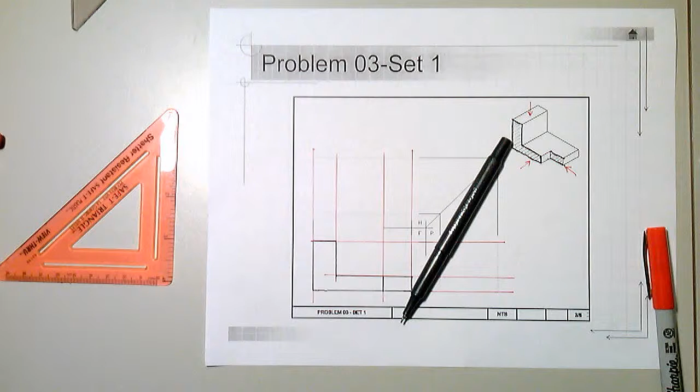Okay. Alright, so now we filled in the front view. Now we want to show our top view. Okay, and then what that's going to require is us to start blocking in this entire face, right? So we want to go ahead and draw these edges and the guidelines for the outside of the object.

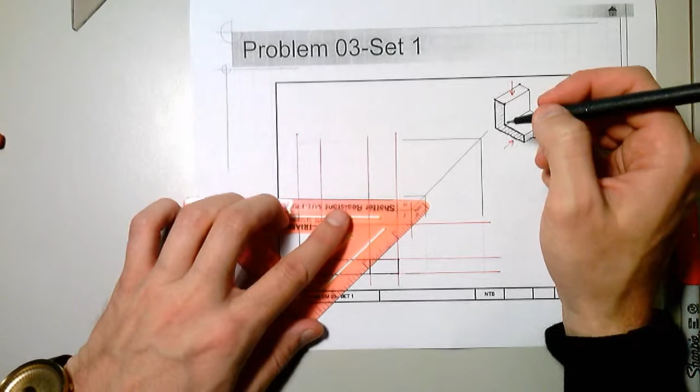So I'm going to start up here. Go there. And now here's the key. When I do this one, I'm going to stop at that line because that line represents that edge.

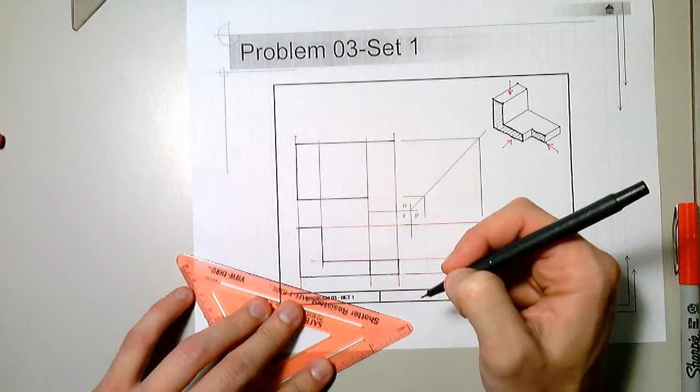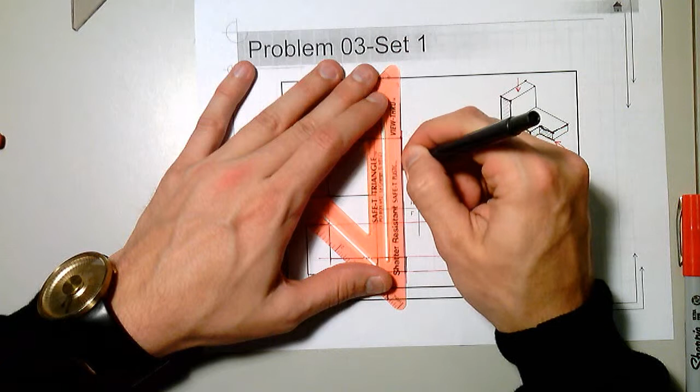Okay, and now the one thing we're missing is we're missing this indentation, right? We're trying to show this shape here. So in order to show that, we're just going to eyeball it, but it's a little over halfway. So we're going to come down a little over halfway and go horizontal to our red line there and close in that shape. So you should end up with something like that.

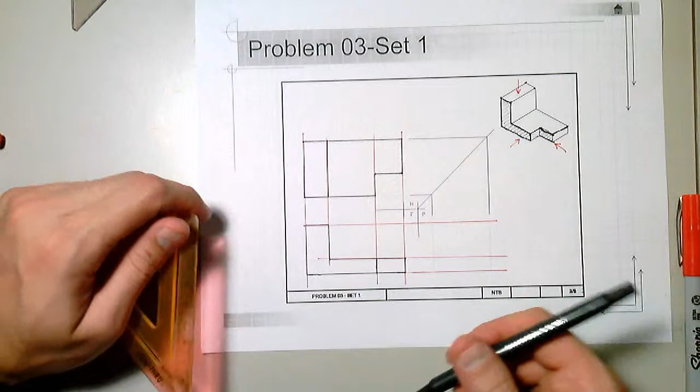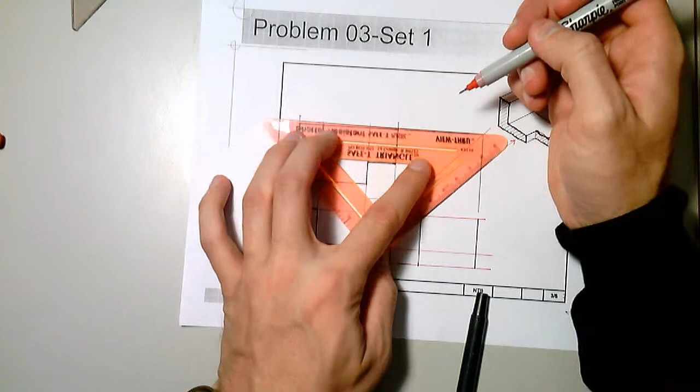Now what we have to do, this is where it's going to get more interesting, right? We're going to need to block in our side view and then use projection lines to figure out the rest of our side view. This is the most important part. So I'm going to go ahead and block in my edges, right? And these are coming from these projection lines here.

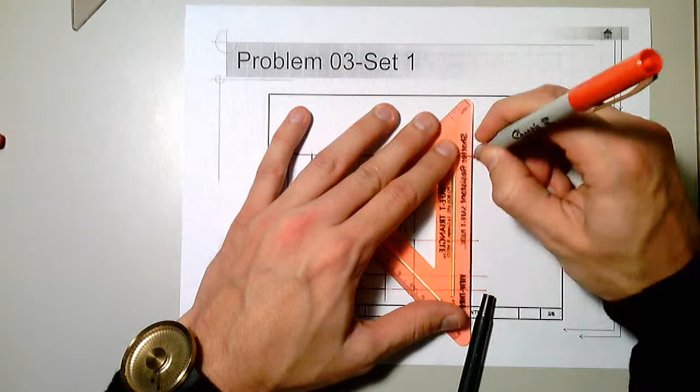Right? And then when you hit this edge meets that edge, and right, so we're hitting this point and we're connecting those lines. And remember, the red pen is a light pencil.

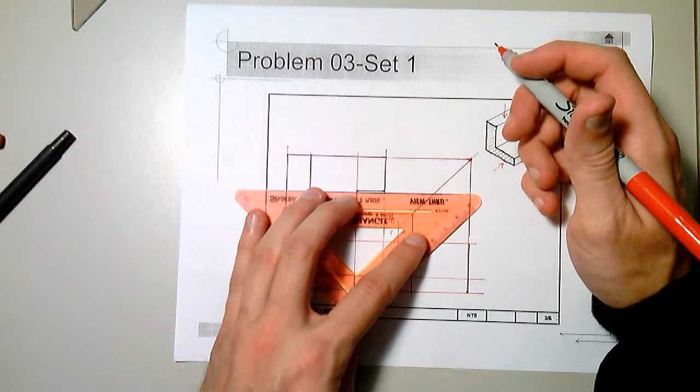Alright, now the trick, we need to take this line, this little groove, this indentation here, and project it to this line, right? Remember, this is the folding plane. This is where the line will be transferred down.

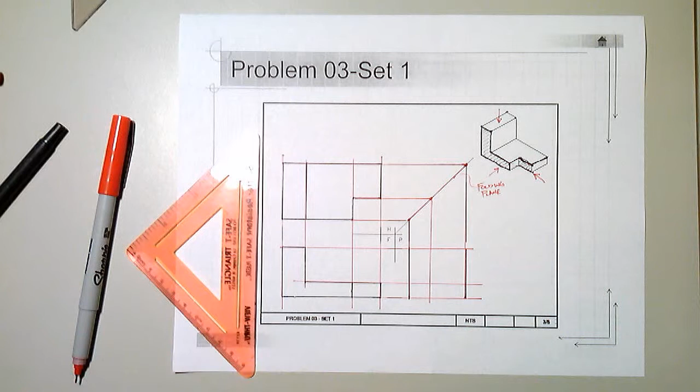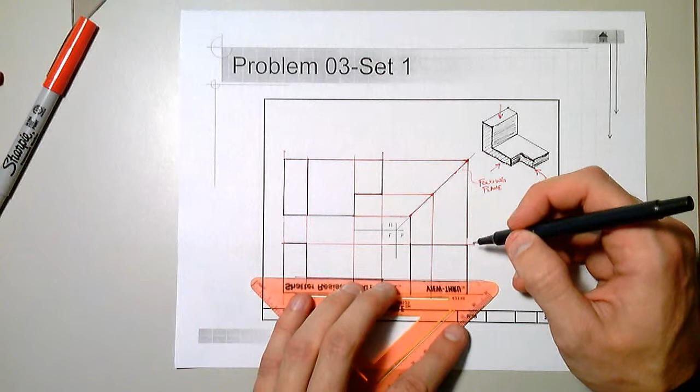And now we need to outline our object. Remember, we're looking at the side view this time, so we're showing everything here, all that, and all that. Okay, so let's go ahead and outline that. And now we need to show that edge here. And that edge is just that little line.

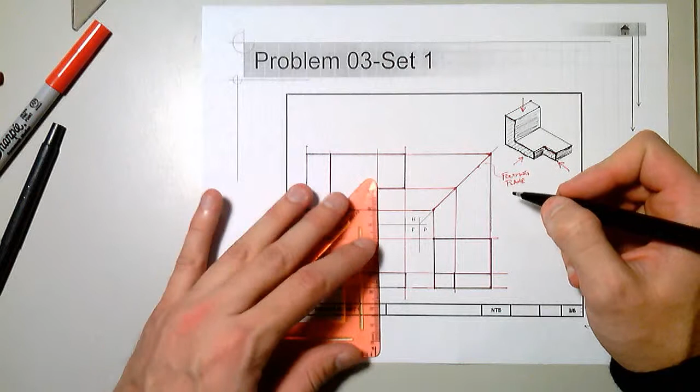Now you can come back over your views and we can pop out the surfaces that are closest to the view. So I'm going to come back to my front view. I'm going to make that area bold that is closest to my arrow on the front view. And then we start to get a really nice drawing.

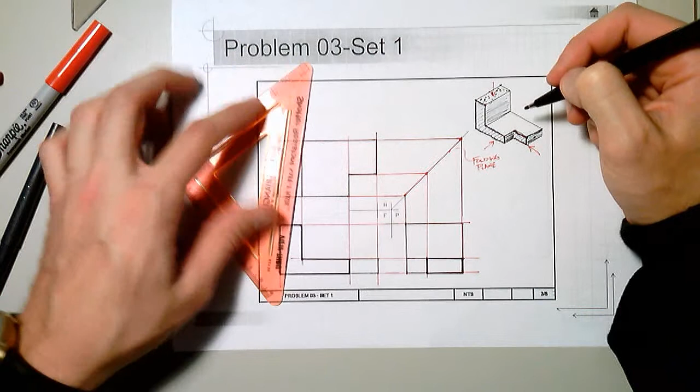If I'm looking at the side view, I'm popping out this face because it's closest to the camera. And then finally the top view, I'm popping out that face. And by popping out, I'm using a bolder pencil to reinforce that there is a different height of the object.

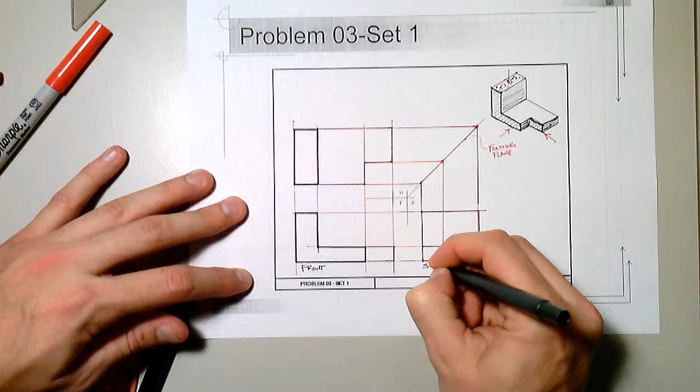Right, so we have our front view, side view, and top view. Alright, there's drawing 3. Now we're going to move to 4, doing some of the same processes, right? This is the same exact object, right? But we're just adding little steps, little cut-ins to the object itself.

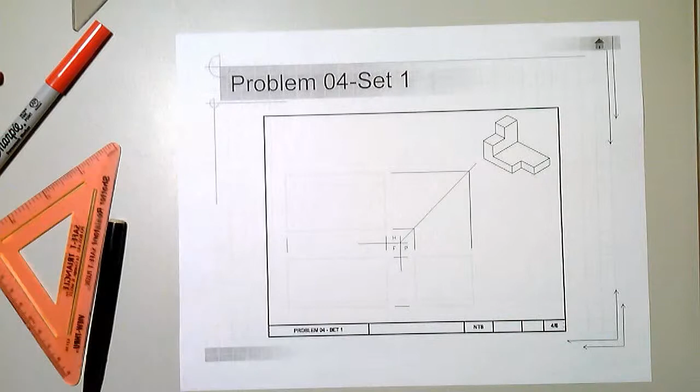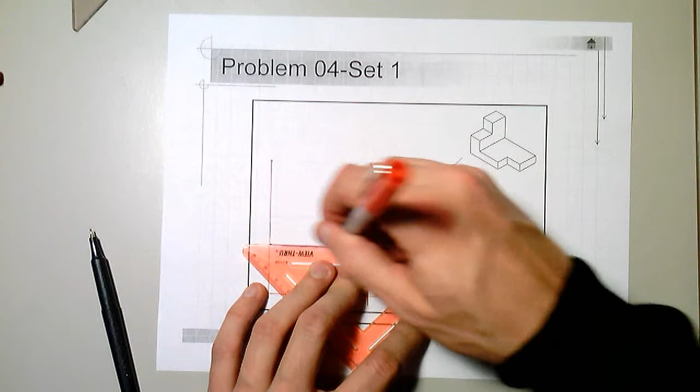So let's do the same process as we were earlier. Let's do our projection lines for the height, right, and the width. Anchor our view down. And do our outer edges, our top edges. So we frame in this front. Alright, now we have a block.

Now let's start sketching, drawing with our straight edge these profiles, right? We're trying to show these edges. So we're going to first start with these points, move to these points here, and make that L shape.

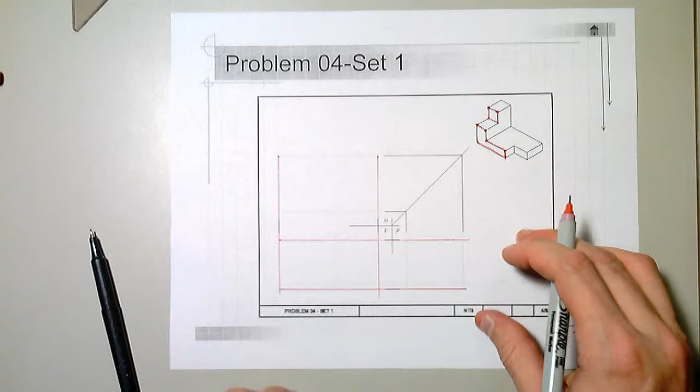Alright, so we need to find this point right here. Let's make a vertical line, just something that looks like that thickness, right? This line is far over from there, so we just want to show a vertical line all the way down. Alright, and now we're going to do one for the lower leg of the L.

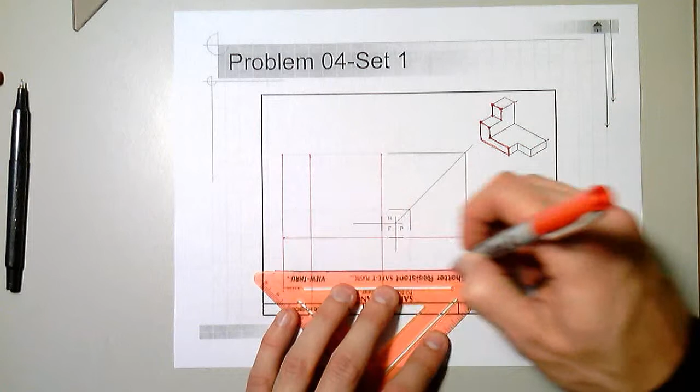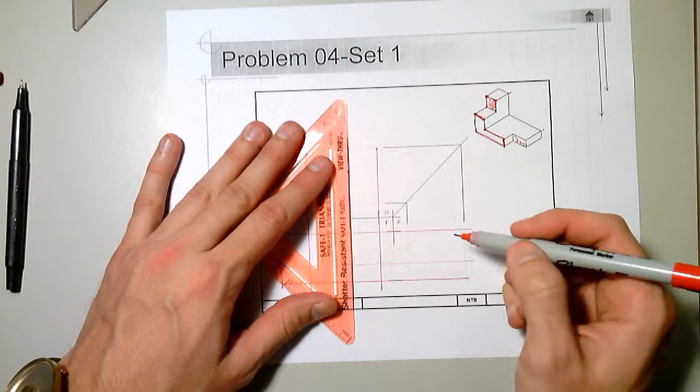Okay, and now I've created that L-shaped surface, which represents the whole view, but now I need to come in and cut these little chunks out, these little surfaces here. These got to pop out of this view. So I'm going to use a couple guidelines here. I'm going to use this guideline to show there, and then to show this edge, I'm going to use this guideline up here.

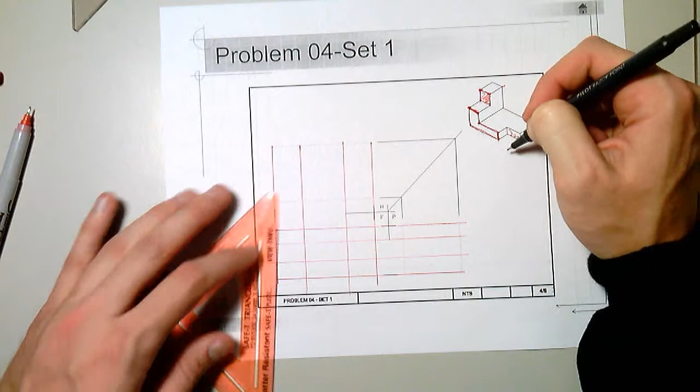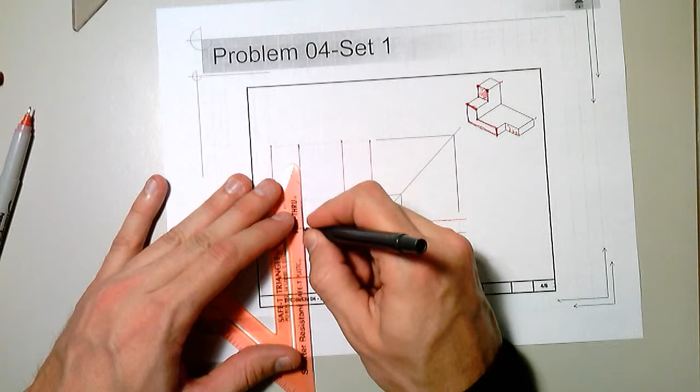Alright, now we got a mess of lines, but let's just take a step back and draw the big picture and work in the details. Like we said, we're going to draw this whole L shape. Draw our bottom edge. Draw our top edge, but we're going to stop right here. Then we're going to go down to the bottom leg here, and we're going to go all the way over. And we close off the shape.

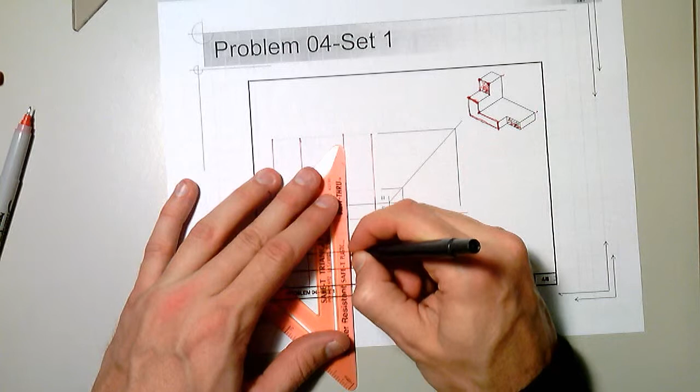Now we want to draw in those grooves, these surfaces here. So those grooves happen where we drew our guidelines. There. Okay, now I'm going to use my heavy pen to darken in this face closest to the camera, closest to the view.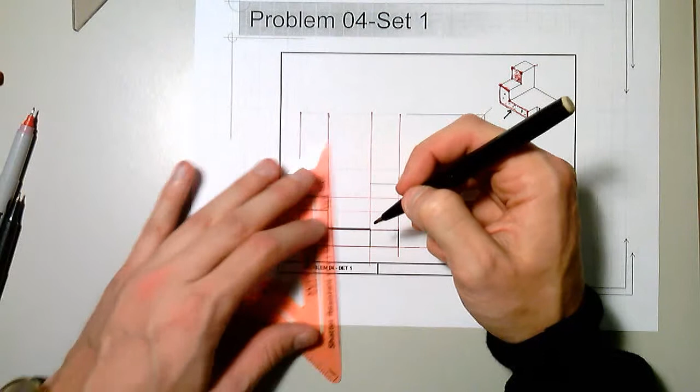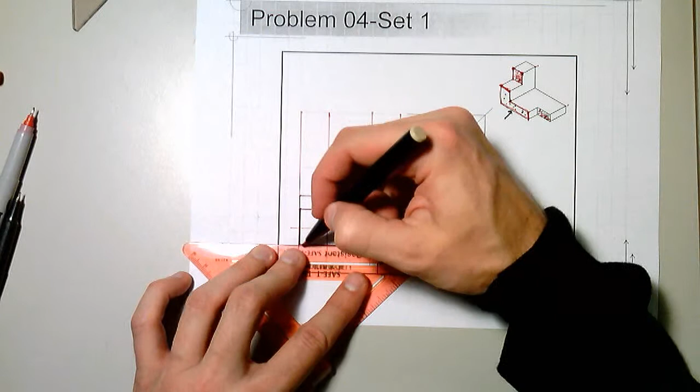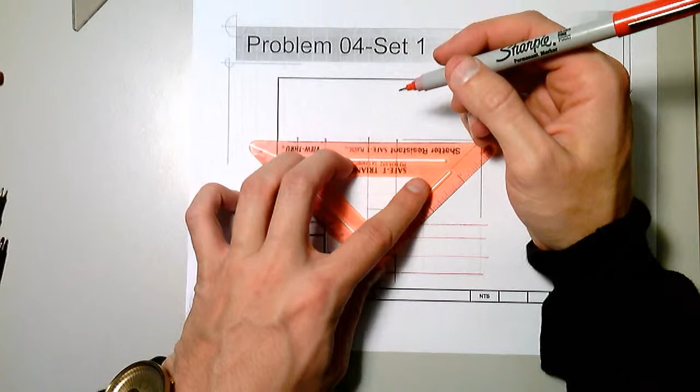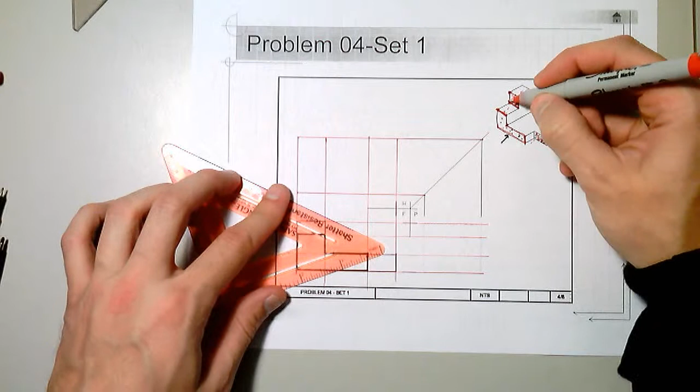Alright, now we're going to do all that same stuff on the top view. So I'm going to block in. We created our block out there, and now we need to find those lines that split these faces in the top view. And let's make this line and that line the same. So we're going to draw a horizontal line over for now. Now if we trace that top view, remember it's like we're looking down there.

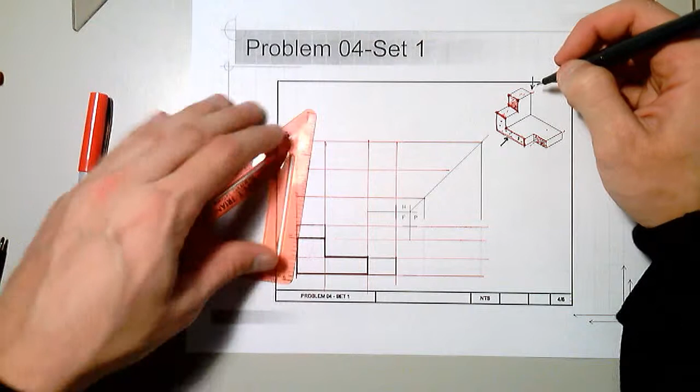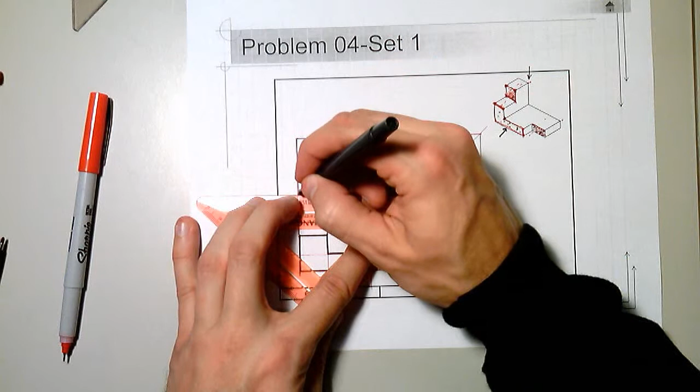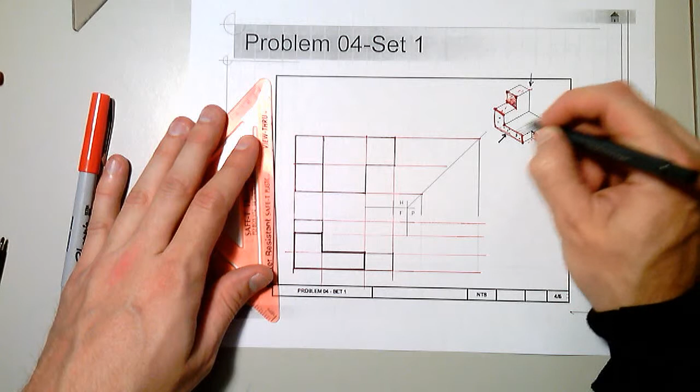Here, I'm only going to draw that leg and this line, as so, and then my bottom line, but only to this point here. And now I'm drawing the top faces here and here. And that is your complete top view. We've just shown this surface, which is here, and then we've shown this surface, which is up here.

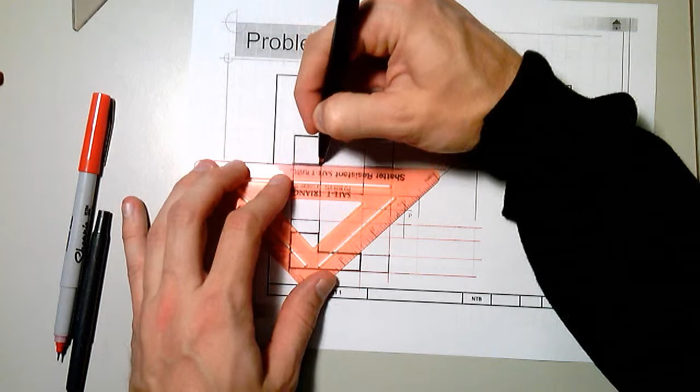Now let's pick out that elevated platform, which is this piece. We want to pop that out with our heavy pencil. And by heavy pencil, I mean your 3B, 2B, or you want to bear down really hard to kind of get this to pop out off of the page.

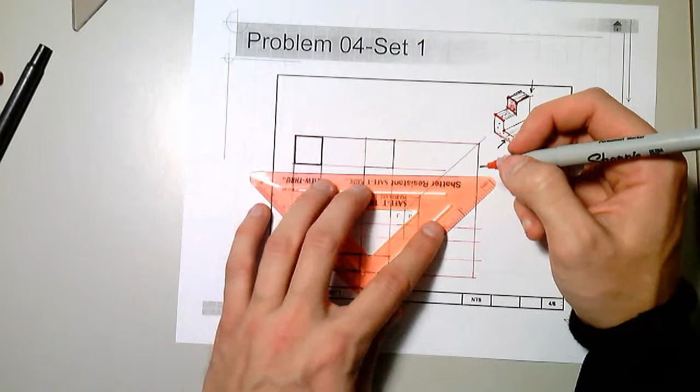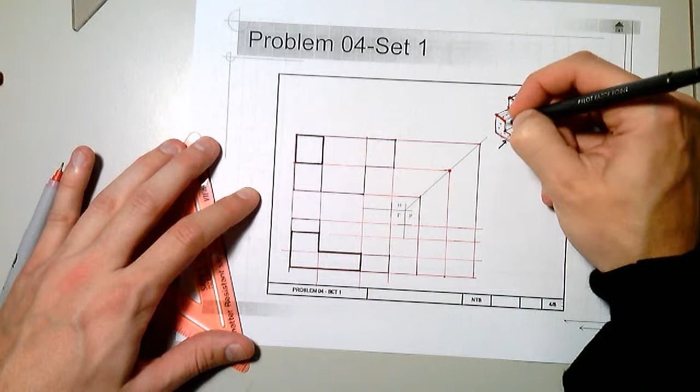Okay, now let's continue with our guidelines. So we've made our horizontal guidelines here, and now we're going to strike our guidelines to finish out our side view. And remember where this line hits the folding plane, we go vertical. We're going to complete that side view, just like we're looking at the part from this angle. So that would mean this face, and even this face here. Alright, so I'm going to block that in.

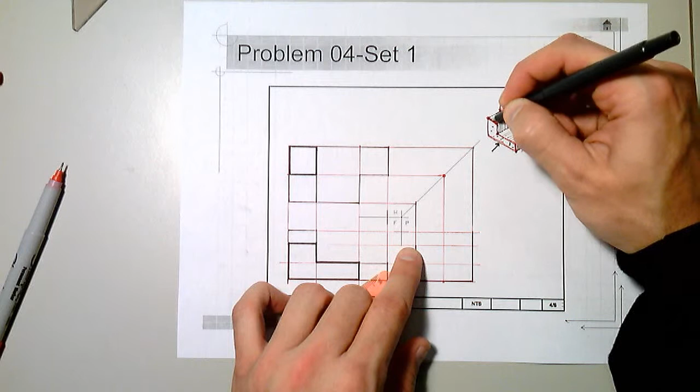Back edge, bottom edge. Now I'm going to draw vertically, but you got to stop at this point, because that point and that line represent this edge. We want to keep this part cut out. Our side view will look like that on the top, and here as well as here. So let's close that in.

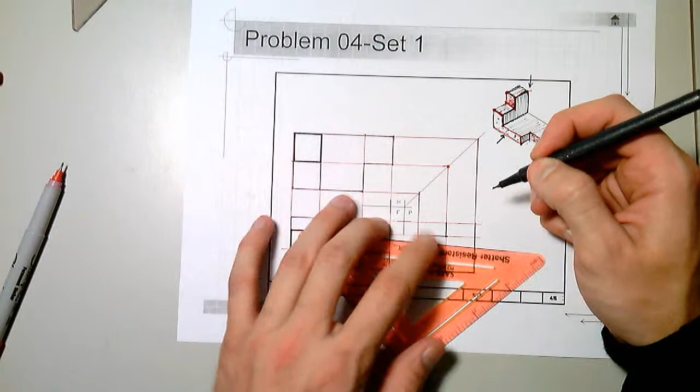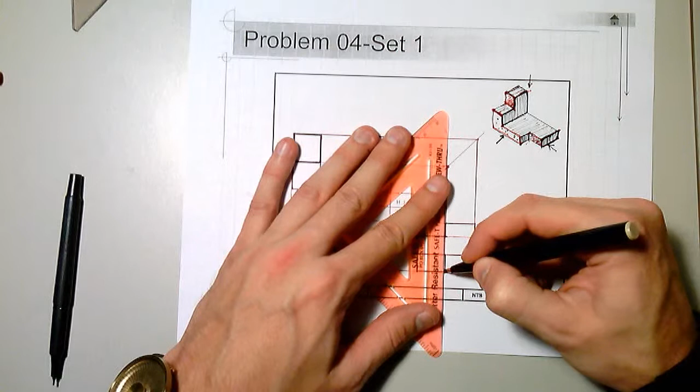Alright, so that's our side view, and let's create this bump out. And that gives you your front, side, and top views.

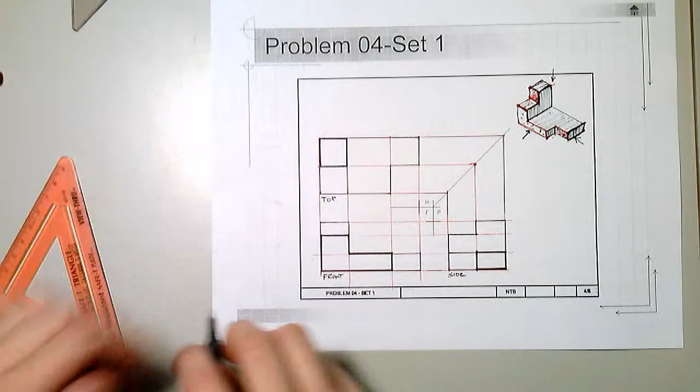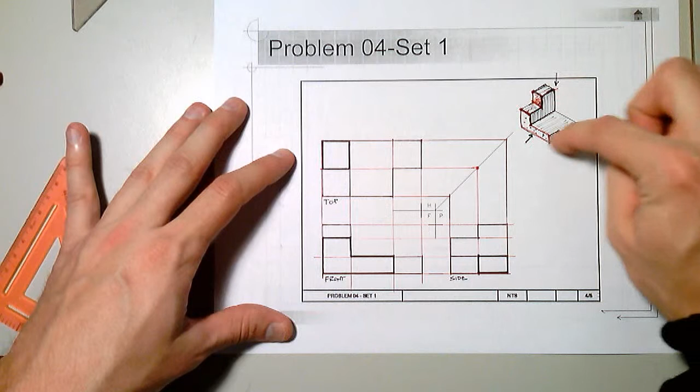Okay, now that we've completed those four, you're going to do the same continuing steps on the rest of the drawings. So for 5, 6, 7, and 8, you're doing the same kind of process. Find your front view, create some assumptions, make some even lines based on proportion, transfer those lines to a top or a side view, and again, using proportion, your eye to guess, create some guidelines and continue that by filling in the rest of the views. Alright?